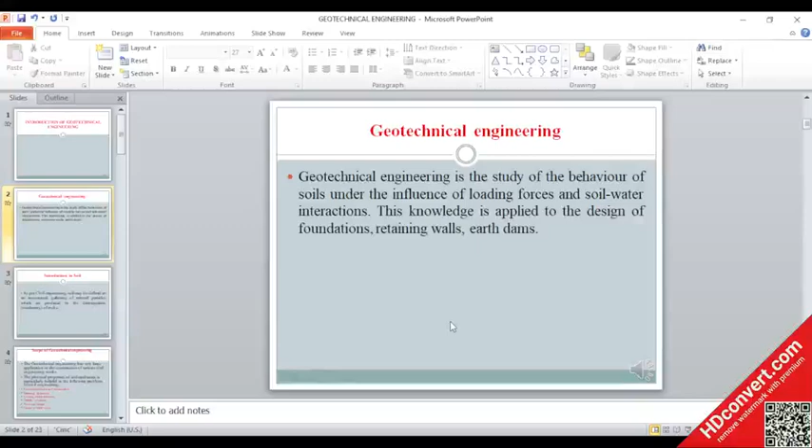Geotechnical engineering deals with how soil behaves when subjected to loads and how water in soil affects that behavior. This is essential in safe design of foundations, retaining walls, dams. We can also say it is the backbone of civil engineering when building anything on or in the ground.

Next is introduction to soil. As per civil engineering, soil may be defined as an uncemented gathering of mineral particles which are produced by disintegration of rocks. So here, soil is formed by disintegration of rocks, meaning weathering. Weathering is of two types: physical weathering and chemical weathering.

By physical weathering, coarse grained soil are formed, like sand and gravel, and by chemical weathering, clay is formed.

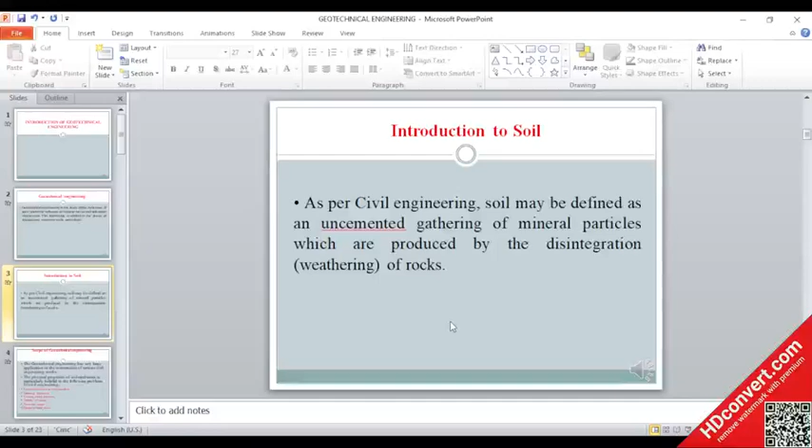Next is scope of geotechnical engineering. Geotechnical engineering has very large application in construction of various civil engineering works. The physical properties of soil mechanics are particularly helpful in following problems of civil engineering like foundation design, construction, retaining structures, underground structures, stability of slopes, pavement design and design of earth dams.

Geotechnical engineering is widely used in designing foundations for structures, retaining walls to hold back soil, planning underground structures like tunnels, designing pavements and road structures, and constructing safe and stable earth dams. It helps a civil engineer to understand soil behavior and select the right construction method.

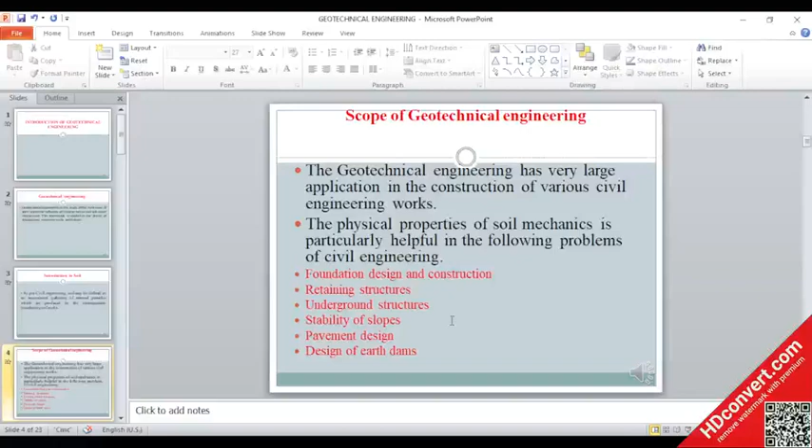Next is foundation design and construction. Every structure transfers its weight to ground.

Foundation is an element of all civil engineering structures. Every structure like building, bridge, dam, highway, tunnel, canal is founded in or on the surface of the earth. Foundations transmit loads of the structure to soil safely. So here, every structure transfers weight to ground.

Foundation depends upon soil type, load and groundwater. There are two types of foundation: shallow foundation and deep foundation. As per the load condition and soil type, we decide the type of foundation.

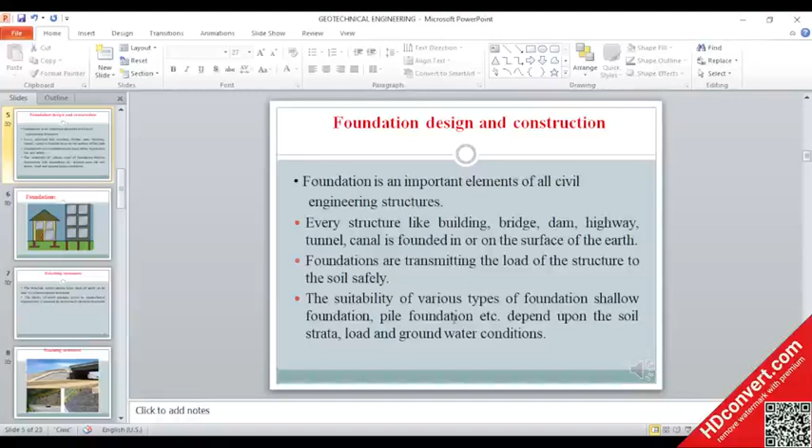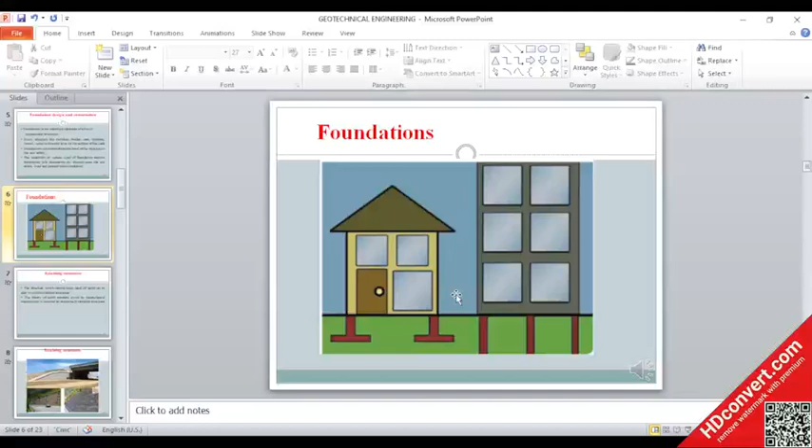Next is retaining structure. The structure which retains a large mass of earth on its side is called a retaining structure. This theory of earth pressure given by geotechnical engineering is required to design such retaining structures.

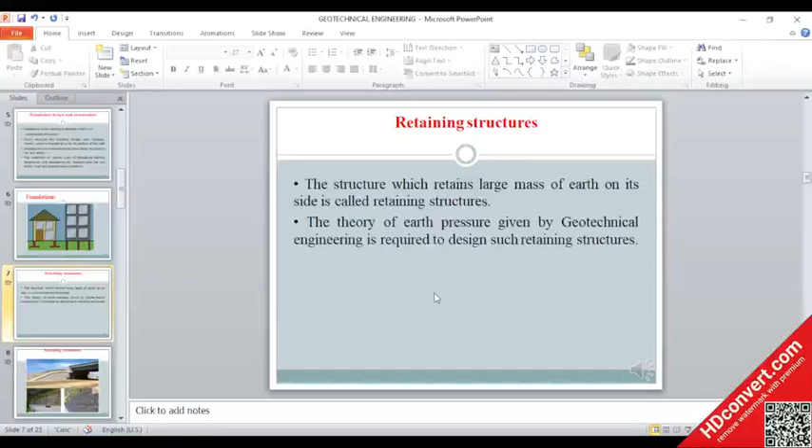Next is underground structures. It consists of tunnels, pipelines, underground buildings which are subjected to various forces exerted by soil mass. A knowledge of soil-structure interaction is essential to properly design such structures subjected to soil loading.

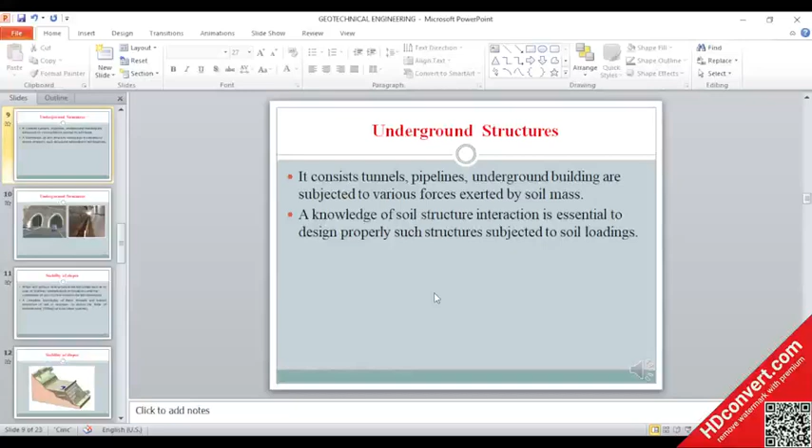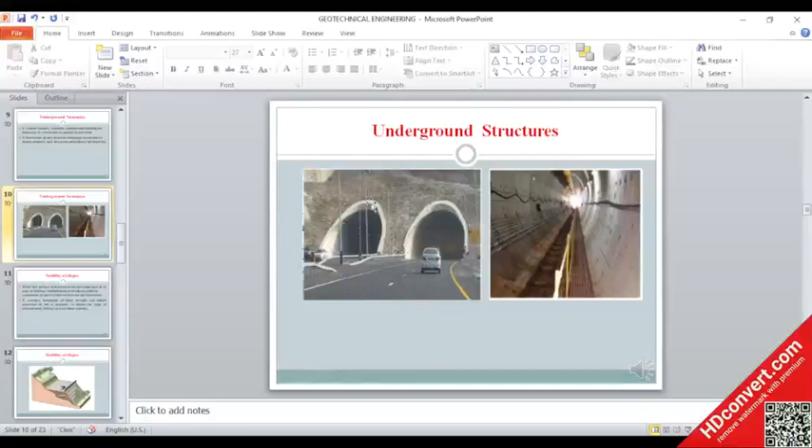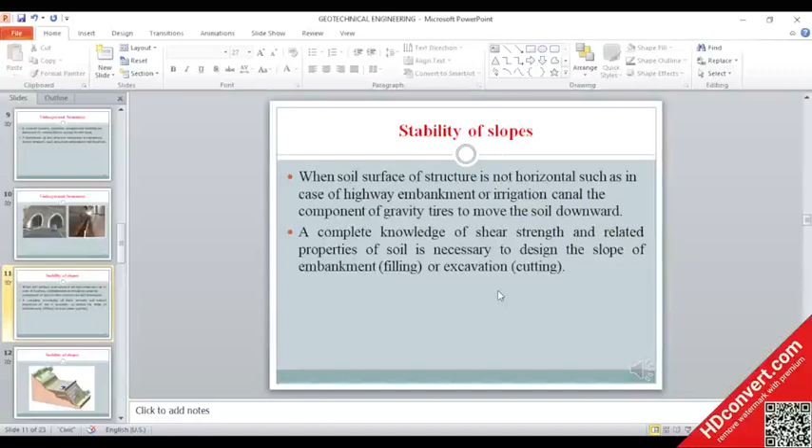Next is stability of slope. When the surface of structure is not horizontal, as in the case of highway embankment or irrigation canal, the component of gravity tends to move soil downward. So gravity tends to pull soil downhill. A complete knowledge of shear strength related properties of soil is necessary to design the slope of embankment or excavation. Engineers use shear strength to design stable slopes and avoid landslide or erosion.

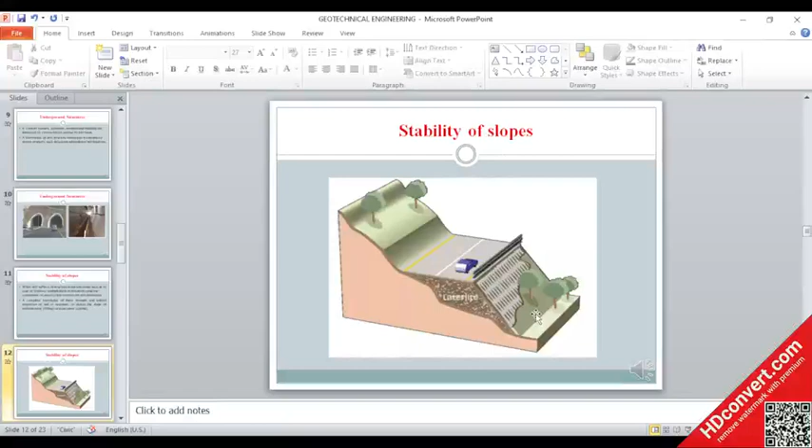Here we can see this image showing a sloped surface with forces acting on it. Next is pavement design.

A pavement can either be flexible or rigid. Its performance depends upon the subsoil on which it rests. So the soil must have good strength and stability. If the soil below the pavement is weak, then we need improvement before road construction.

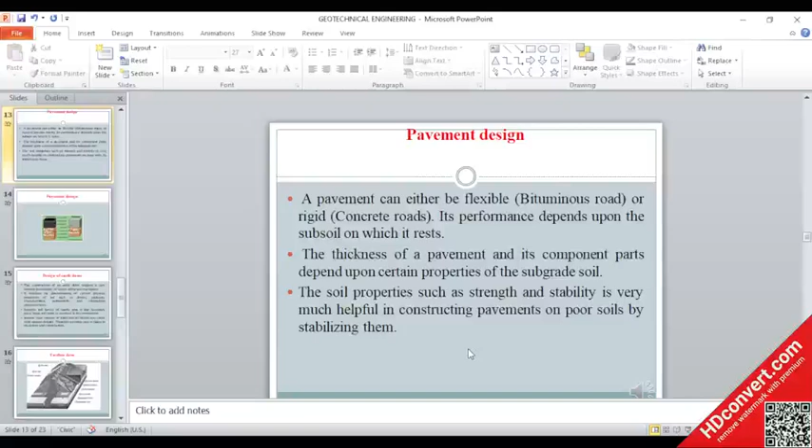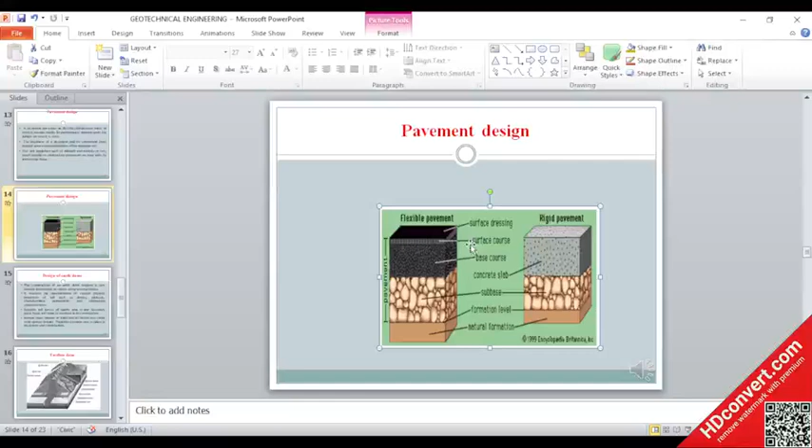So this image is showing the cross-section of rigid and flexible pavement. These are pavement layers: surface dressing, surface course - this is flexible pavement. Base course, concrete slab is here - this is rigid pavement.

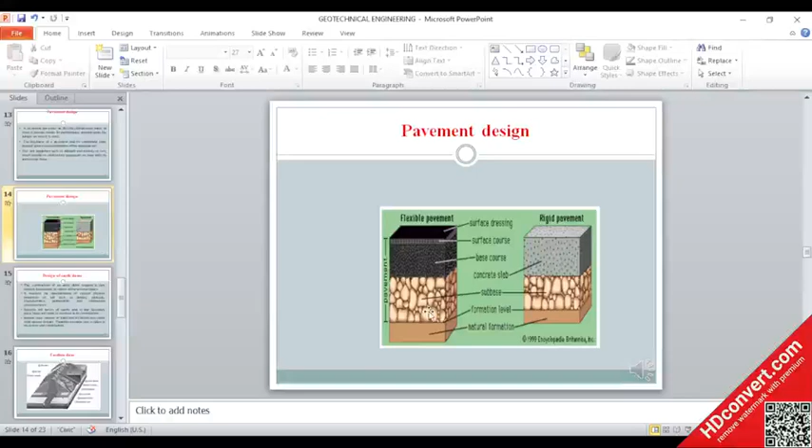So at last we can see this is natural soil below the pavement, and these all layers distribute the load to the soil.

Next is design of earth dams. Earth dams are massive soil structures for storing water. This needs deep knowledge of civil engineering and geotechnical engineering, like soil properties such as density, plasticity, permeability, and compaction characteristics.

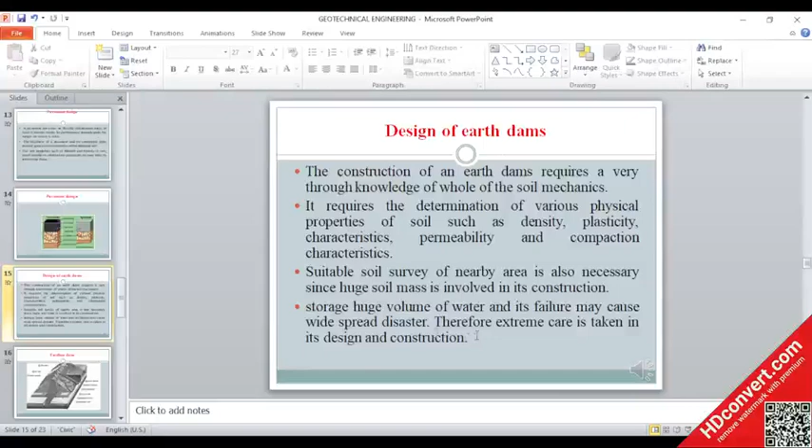So proper investigation is very important before dam construction. If a dam fails, then it can lead to widespread disaster. Therefore extreme care is taken in its design and construction.

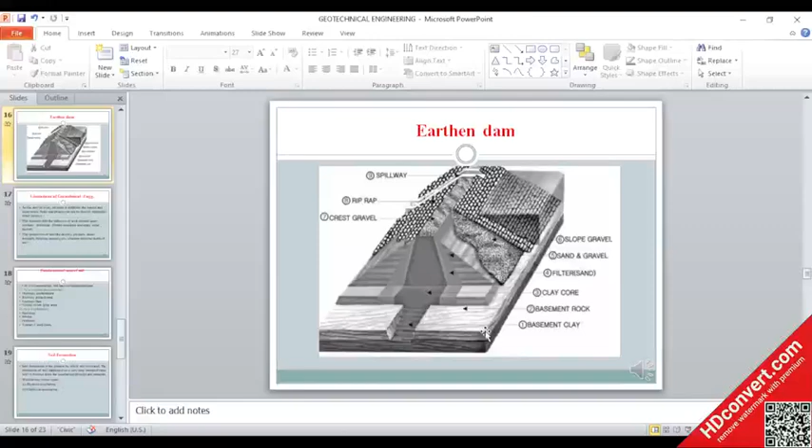Next is limitations of geotechnical engineering. As the soil at every location is different, the experience from one project cannot be directly applied to another project. The strength and behavior of soil depends upon pressure, drainage, climate conditions, and many other factors.

So every site has different soil. Experience from one place to another cannot be copied exactly, because soil behavior varies with pressure, drainage, climate, and depth. This makes prediction difficult and requires site specific studies.

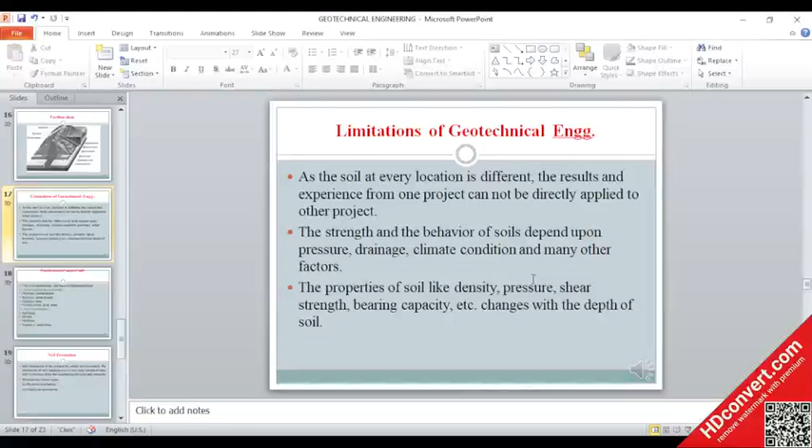Site specific studies are required because soil behaviors are not the same. So these are the limitations of geotechnical engineering.

Next is fundamental uses of soil. In civil engineering, soil has two fundamental uses: as a construction material or as a foundation. As a construction material, we will use it in highway embankments, railway embankments, earthen dams, filling in low-lying areas.

Suppose we want to raise the ground level up, then we can use soil as a filling material. As foundation, building, bridge, highway, tunnels, canal, dam - these are the examples.

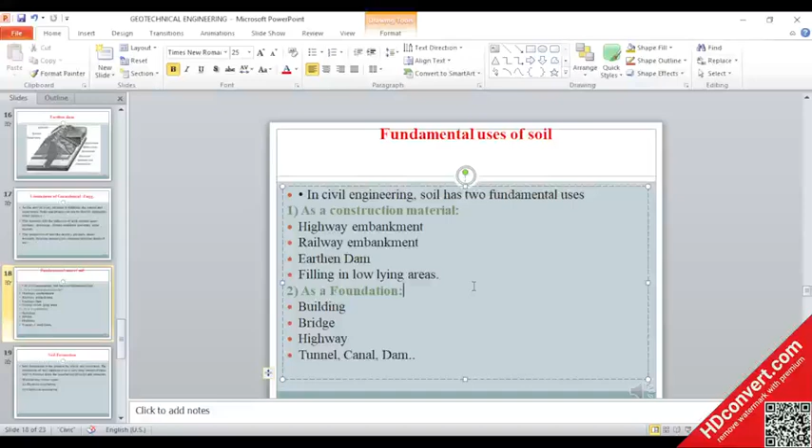So next is soil formation. Soil formation is the process by which soil is created. The formation of soil happens over a very long period of time. Soil is formed from weathering of rocks and minerals.

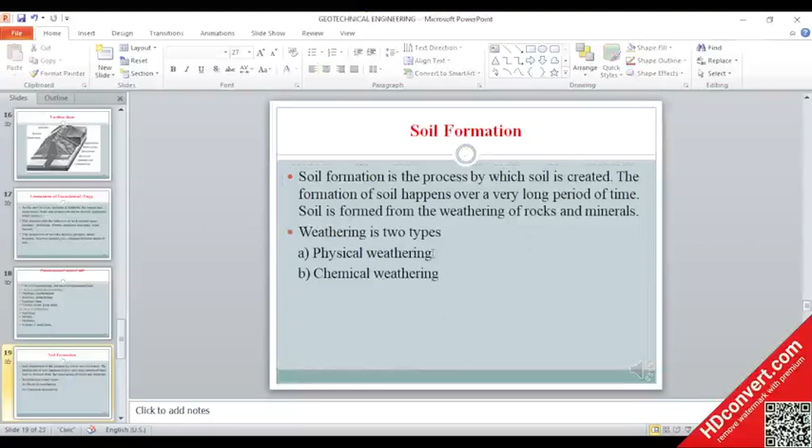So soil is formed by weathering of rocks, and weathering is of two types: first is physical weathering, second is chemical weathering. Physical weathering involves breakdown of rocks and soil through direct contact with atmospheric conditions such as heat, water, ice and pressure, without any change in chemical composition.

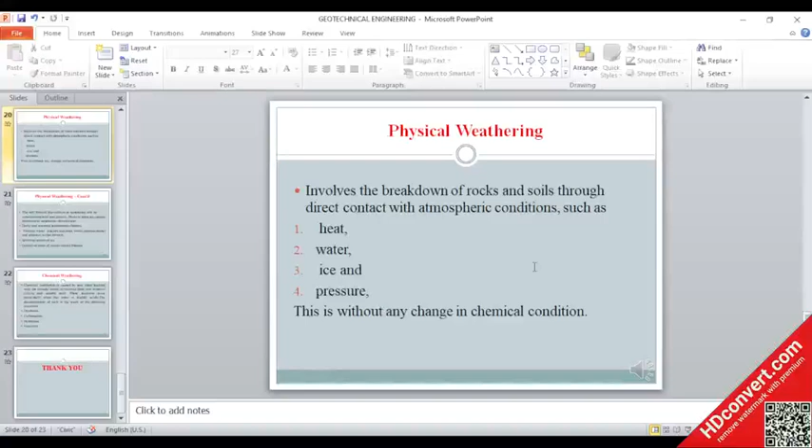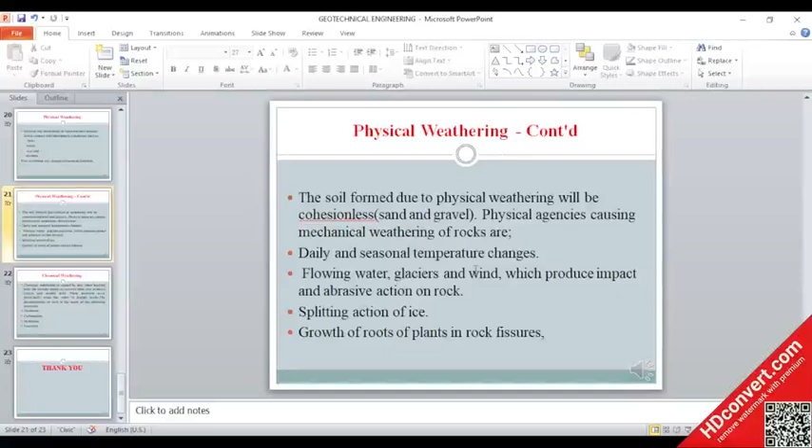By physical weathering, we can find coarse grained soil like gravel and sand. Sand and gravel are formed by physical weathering, because of daily and seasonal temperature changes and flowing water, glacier and wind, which produce impact and abrasive action on rock. Also the splitting action of ice and growth of roots of plants in rock fissures are causes of physical weathering.

Next is chemical weathering. Chemical weathering is caused by rainwater reacting with mineral grains in rocks to form new minerals and soluble salts. These reactions occur particularly when the water is slightly acidic. The decomposition of rock is the result of reactions like oxidation, carbonation, hydration and leaching.

Chemical weathering involves the reaction between rainwater and rock minerals. It produces clay minerals and soluble salts. Oxidation, carbonation, hydration and leaching are the causes of chemical weathering. Oxidation means oxygen in air or water reacts with rocks.

Carbonation is rainwater forming a weak acid called carbonic acid, which reacts with minerals of rock - that is also a cause of chemical weathering. Hydration is when water molecules combine chemically with minerals of rocks - this is also chemical weathering.